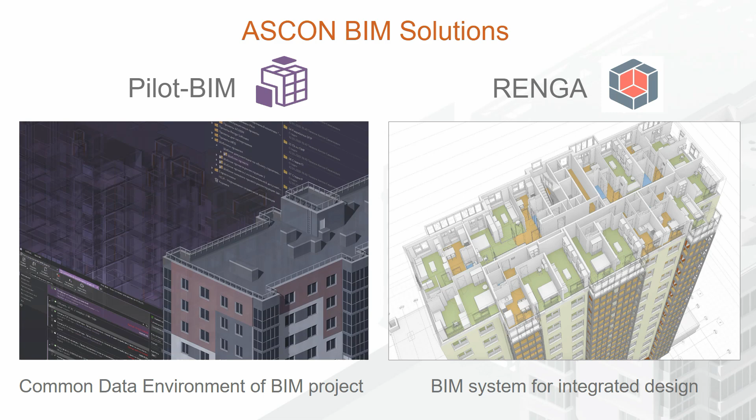If we consider the products throughout a building's life cycle, Renga will cover the initial design stage, from sketches to detailed design. The Renga BIM model, created during the design stage, can be actively used at the subsequent stages. Pilot BIM, as a common data environment, covers all stages and is used effectively during the planning and design phases, as well as during the pre-construction, procurement, construction and post-construction phases.

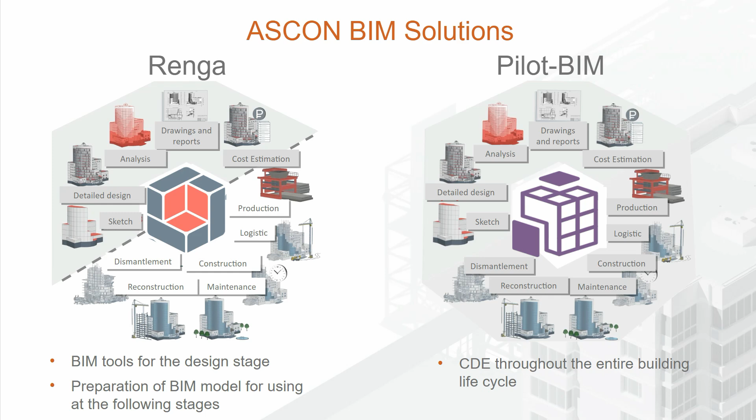In this presentation, we will focus on Renga's functionality. With Renga, you can create 3D models of buildings and constructions of various types and shapes. Our product team is focused on making our BIM software simple and accessible to everyone. Renga is easy to use and can solve all design tasks. It is based on a proprietary geometric kernel.

We will now show you a video demonstrating the system interface and the design sections.

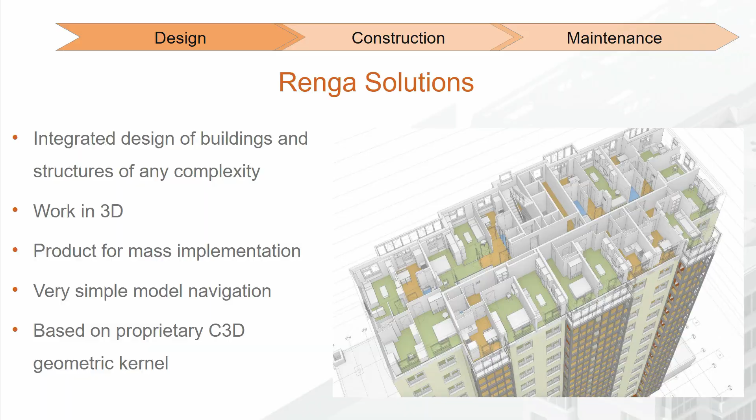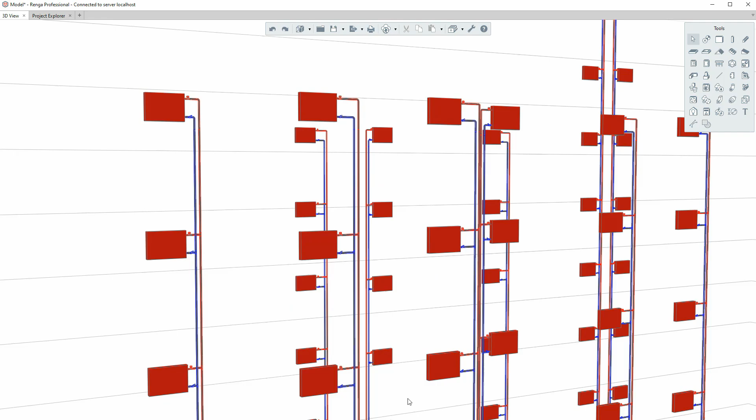Renga is a BIM system for integrated design. Users can create architectural projects, structural projects, 3D models of internal engineering systems, such as water supply and sewage, heating, ventilation, electrical networks. They can also work with process equipment.

One of Renga's main advantages is its unique real-time collaboration functionality. It works in a similar way to Google Docs. If your colleague adds an object to the model, you will see this object immediately. In Renga, all project members work in a single environment with the same 3D model. Each project team member can track the changes that their colleagues make. This reduces the chance of collisions between architectural, structural, and MEP solutions and reduces the time taken for model coordination.

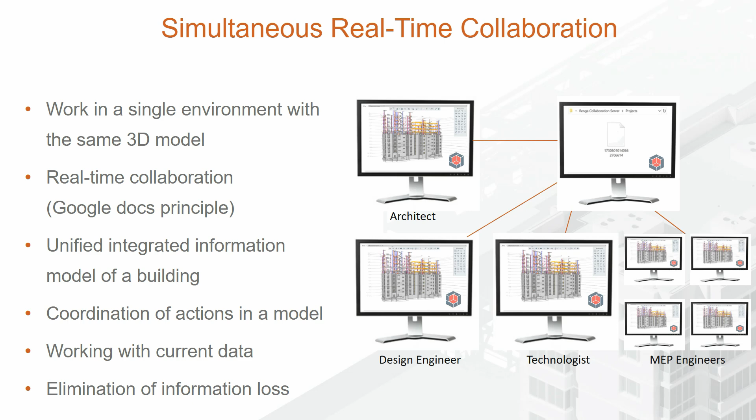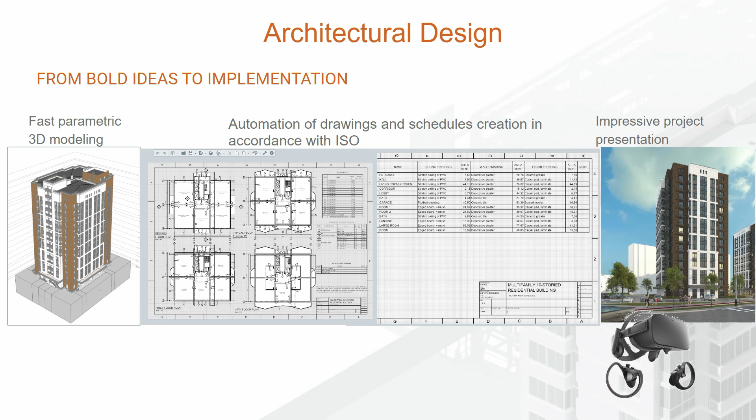Let's take a look at the tools available for each specialization. Renga gives architects the opportunity to complete all tasks of the design stage, from working with sketches of space planning and interior solutions to creating detailed plans and drawings, and transferring the project to rendering apps. You can create a limitless number of classical and modern architectural building forms, as well as working with complex architectural forms. We will now show you projects created by our users with Renga tools.

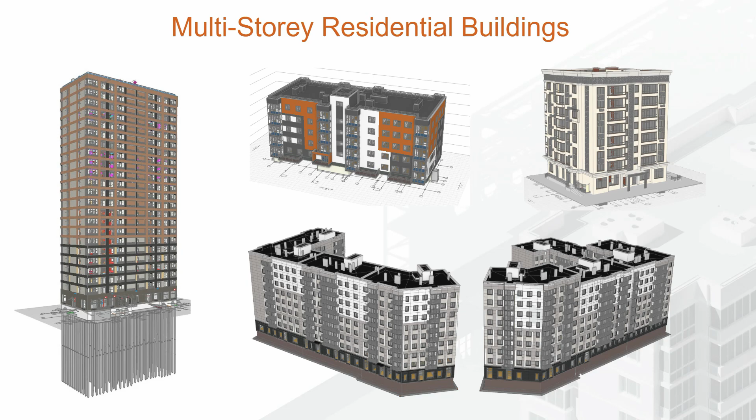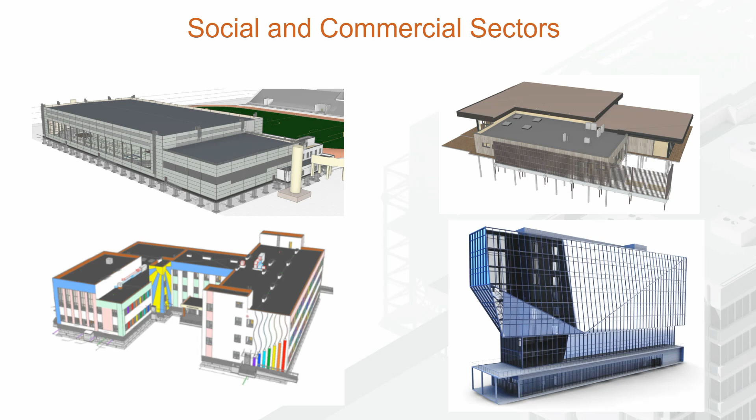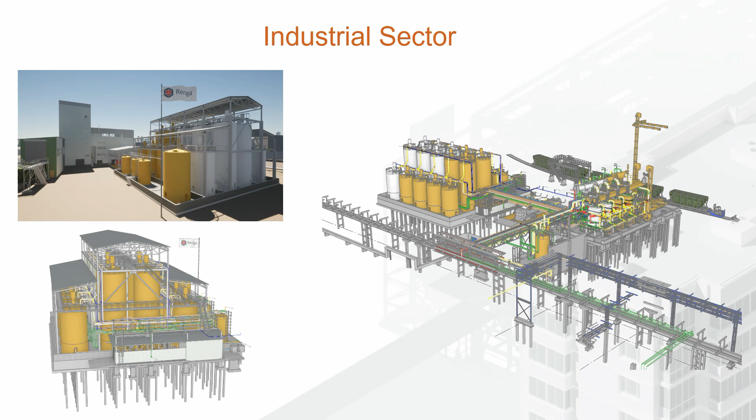Residential complexes. Different types of individual residential buildings. Renga is widely used for designing schools, universities, kindergartens, hospitals, stadiums, restaurants and shopping malls. It's also good for 3D modeling of plants, factories, warehouses and staff modules of industrial buildings. Moreover, it is possible to make reconstruction projects of cultural heritage objects in Renga.

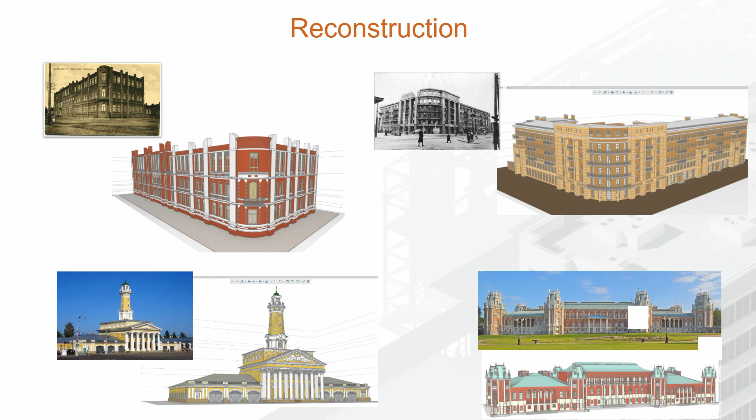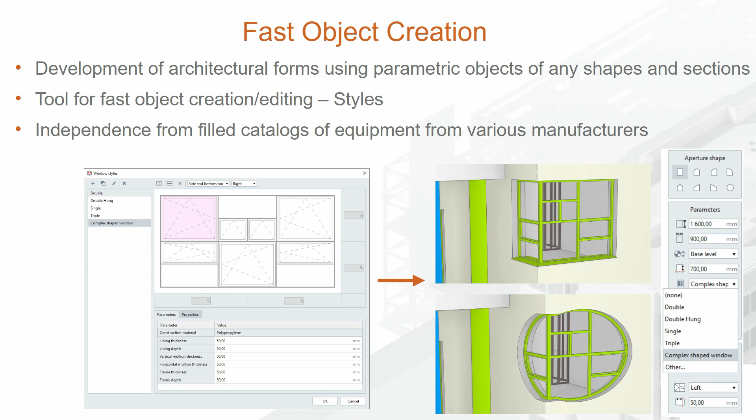Renga objects are created using the Universal Object Creation tool, Styles. To create a new object, simply select the appropriate base object and change the specified parameters for this type of element. This means you become independent of catalogs of equipment from various manufacturers. Let's see how this works.

Renga provides architects, design engineers and internal network engineers with tools for the rapid creation and editing of objects. All Renga objects can be created in under a minute thanks to the built-in Styles tool. To create a new object, click the Manage Styles button on the primary panel.

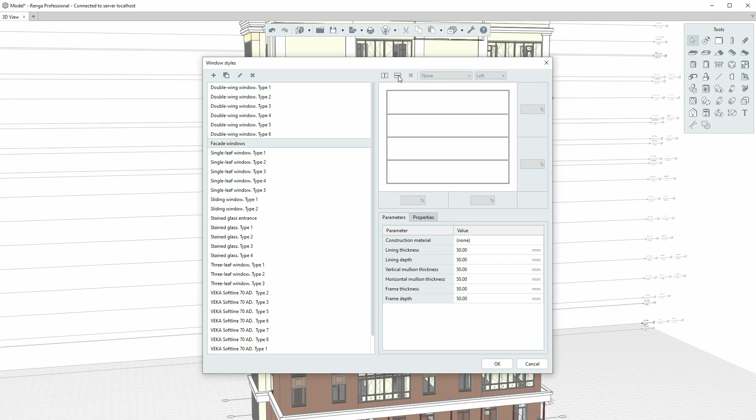Select the required object type, for example, Window Styles. In the Window Styles editor, create a new style. Then, on the right of the window, add vertical and horizontal mullions. Specify the parameters. Click OK. Now place the created window in the model.

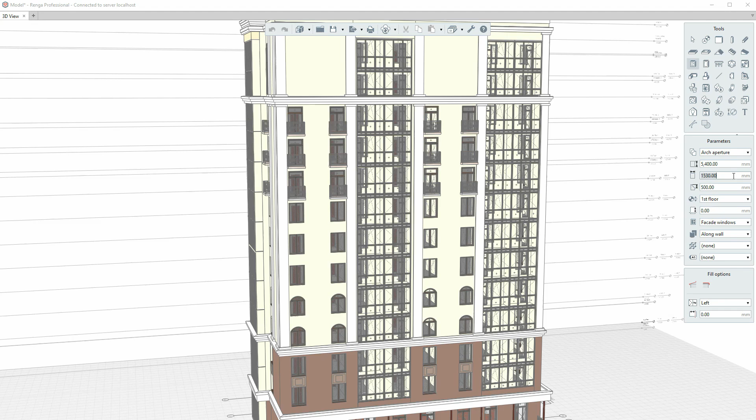On the Tools panel, click the Window tool. Set the window style and specify the window parameters. Finally, select where to install the window in the wall.

In Renga, it is possible to create objects with different levels of detail. These range from elements with decreased level of geometric detail to complex elements with a higher level of detail.

Users can also work with imported objects. The system allows users to import 3D models of solid and polygonal geometry, as well as IFC files. Architects can assign custom parameters and properties to imported objects, or modify their geometry. All elements, together with their parameters and properties, will be reflected in the drawings and taken into account in the schedules. One more important feature for architects is the ability to work with textures.

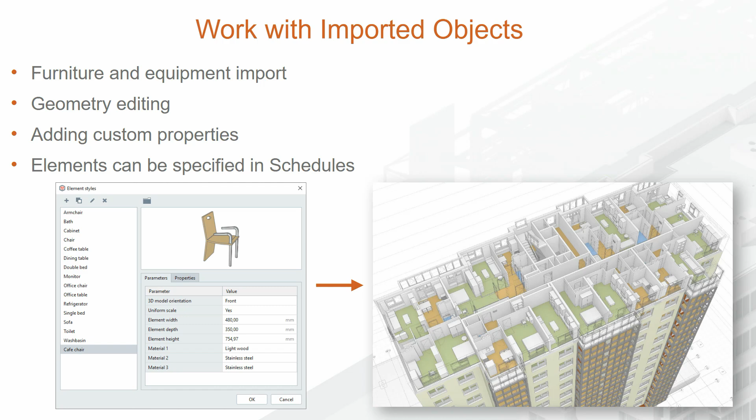Let's now see how this is implemented in our BIM system. The visual style of a model and its drawings can be represented in wireframe, monochrome, color or textured ways. When you select textured, the textures assigned to materials are displayed on object surfaces.

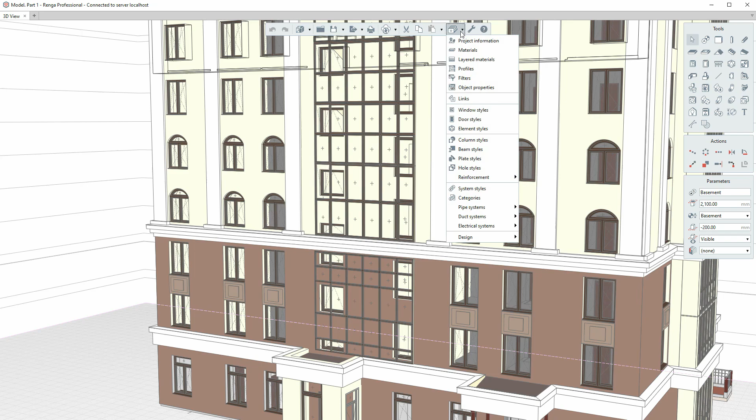To assign textures to materials, click the Manage Styles button on the primary panel. Go to Materials. Create a new material or select one to which you want to assign textures. In the Textures tab, specify an image file in PNG or JPEG format, and set the parameters of its display on Renga objects. Click OK. The texture will then be displayed.

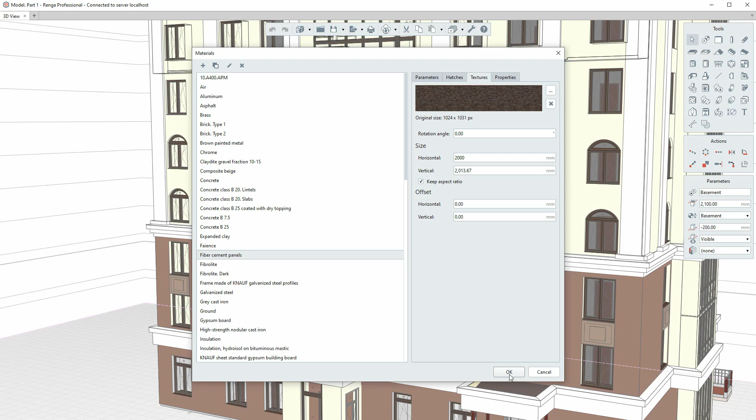This was a brief introduction to the basic functionality required to create architectural 3D models. We will now smoothly move on to the next section.

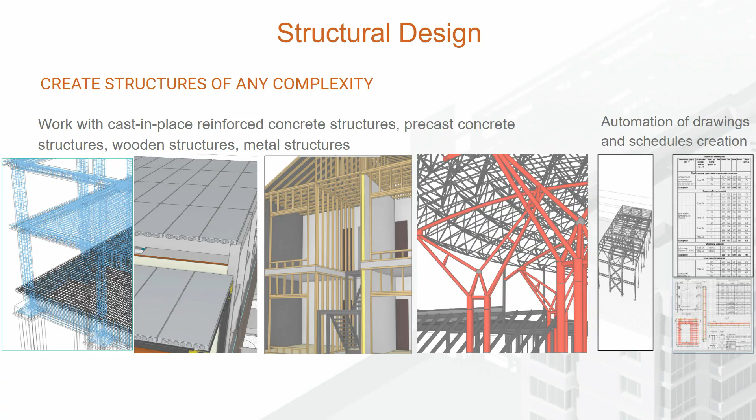Renga provides design engineers with tools for designing monolithic concrete, precast concrete, metal and wooden structures. Two types of structural reinforcement are available for cast-in-place reinforced concrete structures: automated and manual. The automated reinforcement tool significantly speeds up the distribution of rebar in cast-in-place reinforced concrete elements.

To use this option, users need to set a reinforcement style. This is a set of rules based on reinforced concrete structure design standards that can be customized by users. In accordance with these rules, Renga will reinforce structures. The following video will demonstrate the automated reinforcement tool.

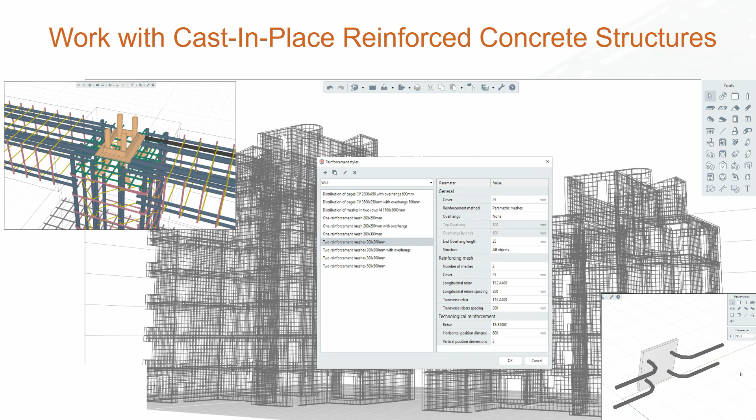In Renga, you can automatically reinforce objects using the Reinforcement Styles tool. To use this option, select the objects you want to reinforce, go to the Reinforcement Styles tab, select an existing style or create a new one by specifying the reinforcement rules.

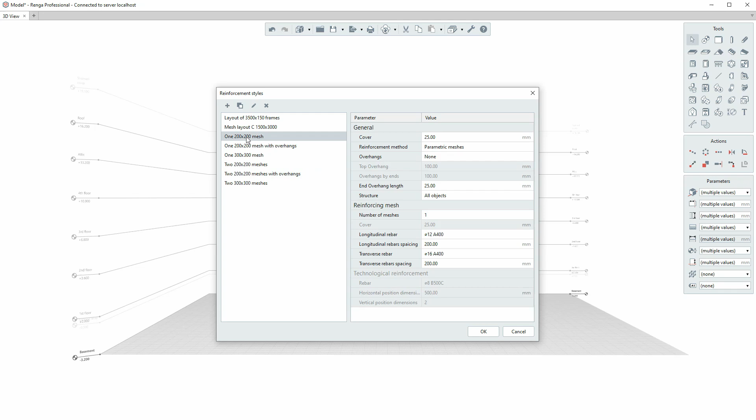You can use different methods of reinforcement: reinforcement with rebars in a given object, and ready-to-use reinforcing meshes and cages. Finally, click OK. Renga will reinforce the selected objects.

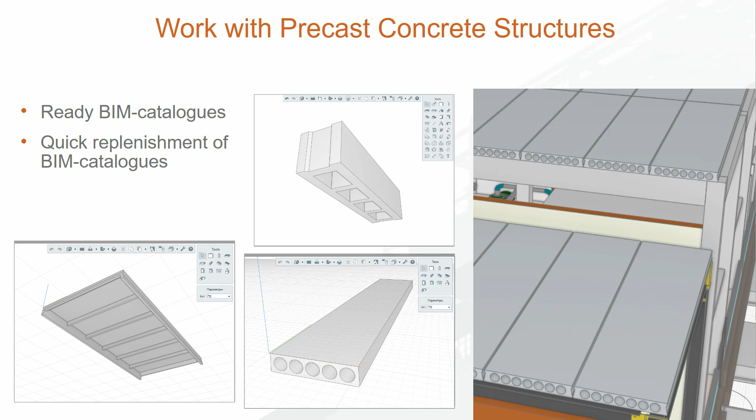Another Renga option is to work with precast concrete structures. The Profile Editor can create profiles of any type and shape for precast concrete structures.

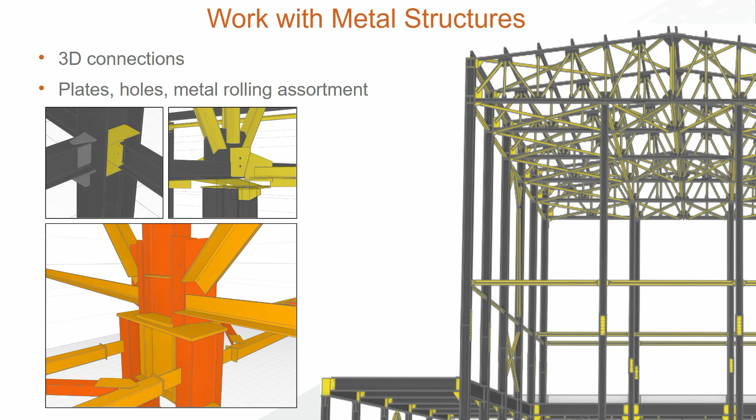Renga provides tools for detailed 3D connection design and creating metal rolling assortments, plates and holes of any type and shape for those who design metal structures. Let's take a look at how users work with metal structures.

In Renga, the main tool for working with metal structures is the Assembly tool. It is used to insert a group of objects created in the Assembly Style tab into a model. In this tab, you can arrange the main objects for modeling metal structures: columns, beams and plates.

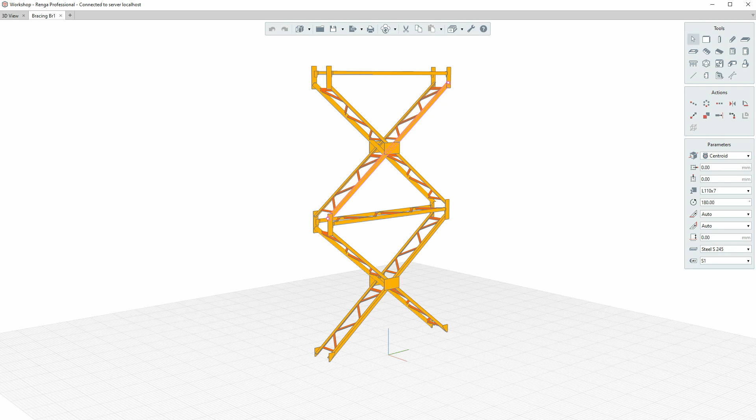Standard profile forms can be used for columns, beams and plates, for example a rectangle, an ellipse or a T-shape. You can also use the Profile Editor to create structural elements with non-standard profiles.

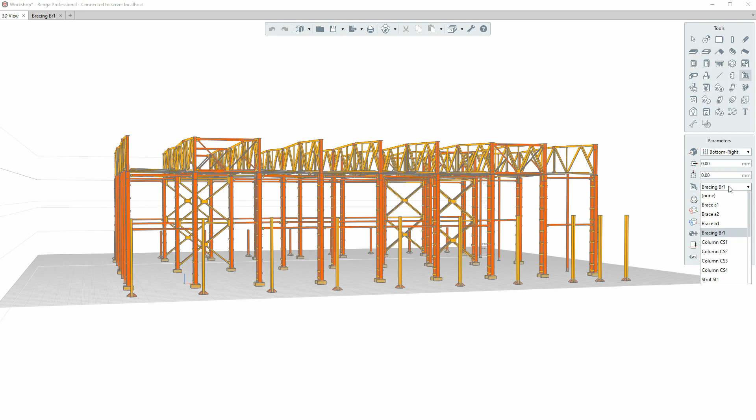To insert an assembly into a model, select the Assembly tool, specify the parameters, and select the assembly insertion point. If necessary, it is possible to convert the selected assembly into individual objects. For that, use the disassemble action.

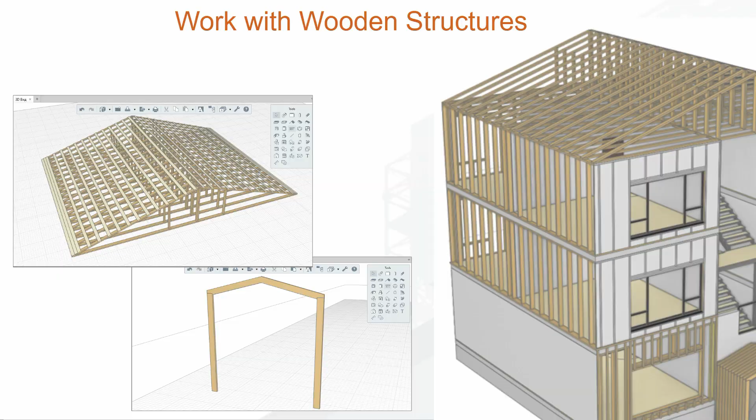The same principle can be applied to working with wooden structures. The next section is the Internal Engineering Systems section.

Renga provides users with tools to design water supply and sewage systems, heating systems and individual heat points, ventilation systems, internal electrical systems and low-current networks.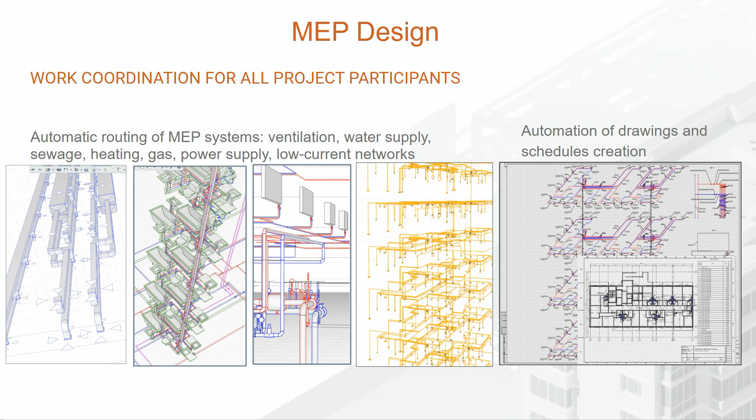There are several ways to create MEP equipment in Renga. The easiest method is to use the Universal Styles tool, which can be used to create all the necessary types of equipment of any manufacturer.

The second option is to apply basic programming skills and use a domain-specific language to create complex equipment. This enables you to develop BIM catalogs in accordance with your company's internal standards.

Any created equipment is automatically connected to the engineering systems using the automatic tracing tool. This tool automates MEP system tracing in accordance with the geometry of rooms. Watch how this tool works.

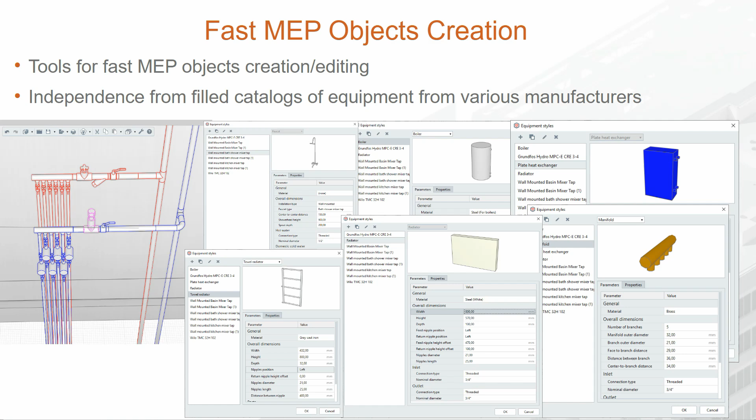In Renga, you can automatically route pipe systems, duct systems, and electrical systems. To use this option, specify the equipment you want to connect to the engineering systems.

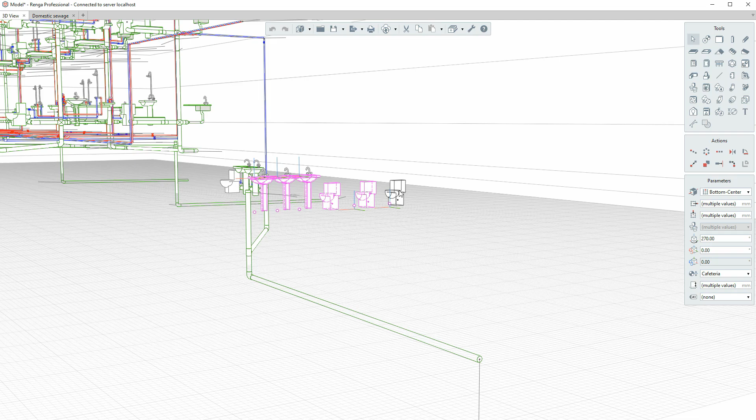Select the equipment in the appropriate system tab. Set system parameters configuration. Click OK.

Then determine connections between objects in the tab with a system. Renga will automatically generate the sewage route.

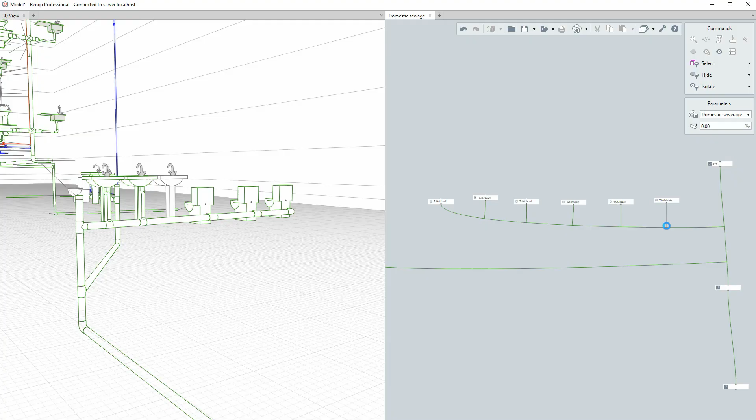During the routing process, the program considers the architectural section objects, such as walls, foundations, beams, columns, windows and door openings. You can edit the result in 3D view if necessary.

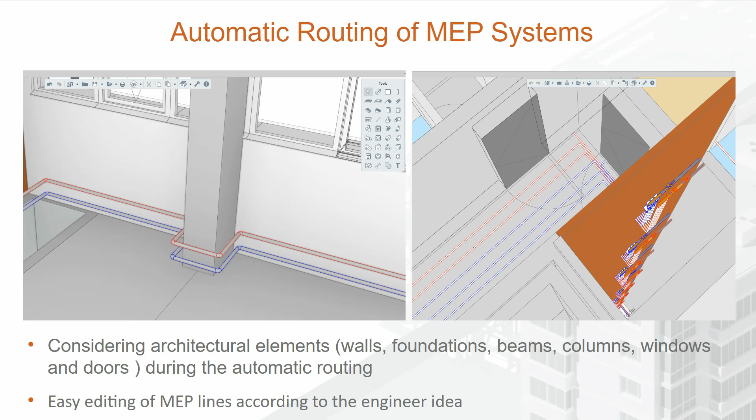The final section is the Industrial Equipment and Process Design section. Renga can be used as a solution by construction technologists. To design complex technological objects, you need to create process equipment and lay technological lines using the automatic tracing tool.

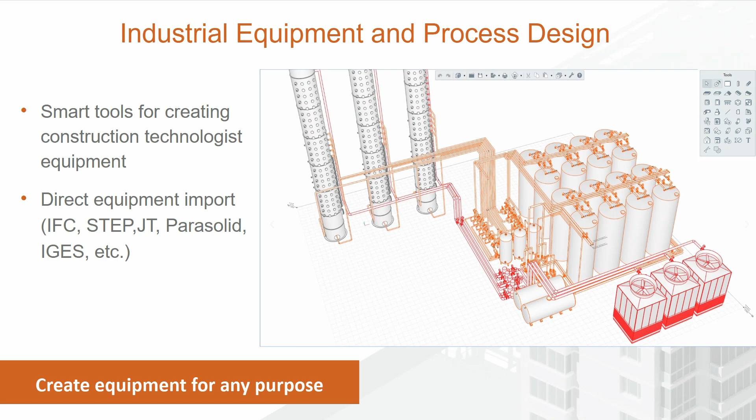At the end of the design process, drawings, specifications and sheets are released. The built-in drawing editor automates the creation of project documentation. Floor plans, elevations and sections are automatically retrieved right from the 3D model.

The schedule tool is used to perform accurate structure volume and material quantity calculations. This tool automatically collects object data and generates reports in table format.

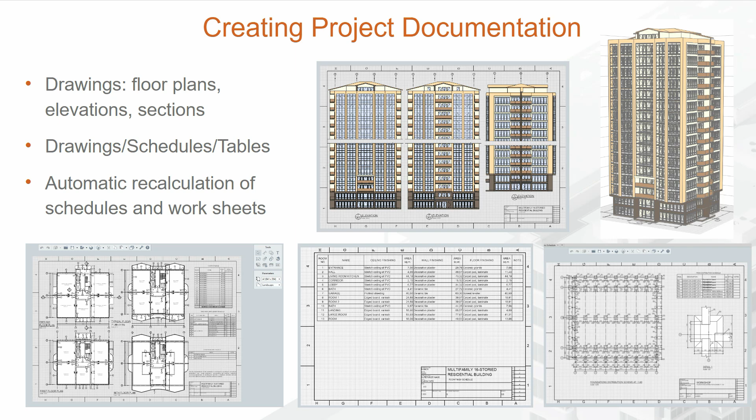If changes are made to the 3D model, the schedules will be recalculated automatically and the drawings will be updated as well. Automatic generation of axonometric diagrams is additionally available for internal engineering systems.

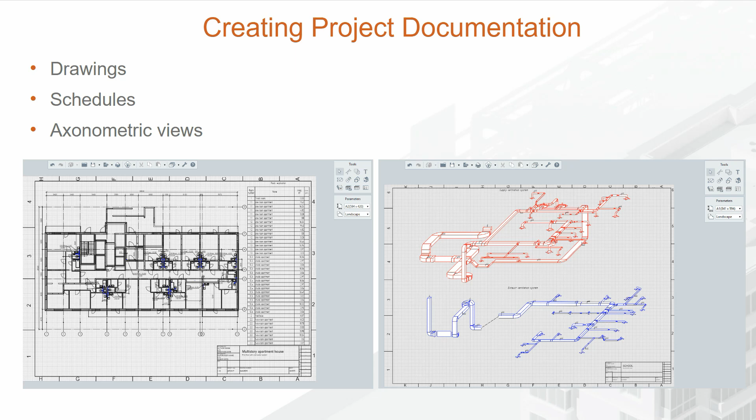We understand that, when working on a project, specialists may use different tools to solve specific tasks. To avoid problems with exchanging data between all the programs used, you can import and export the Renga model in a wide range of formats: solid file formats such as JT, STEP, Parasolid, and IFC for the Open BIM approach.

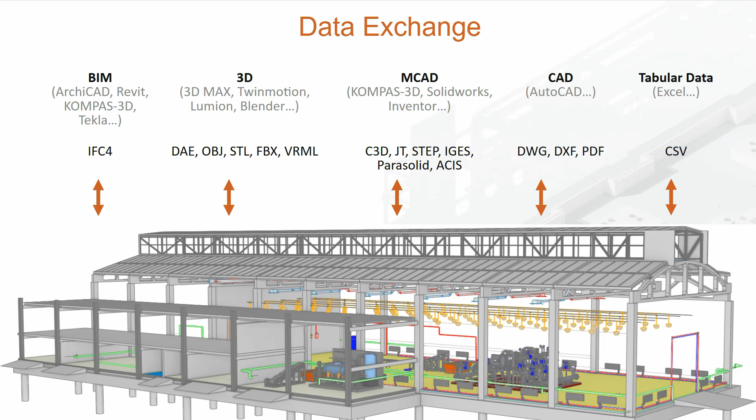The ability to import and export in DWG and DXF formats helps you to interact with other CAD systems. You can also import DWG, DXF or vector PDF data into a drawing or insert it as an underlay in the 3D view.

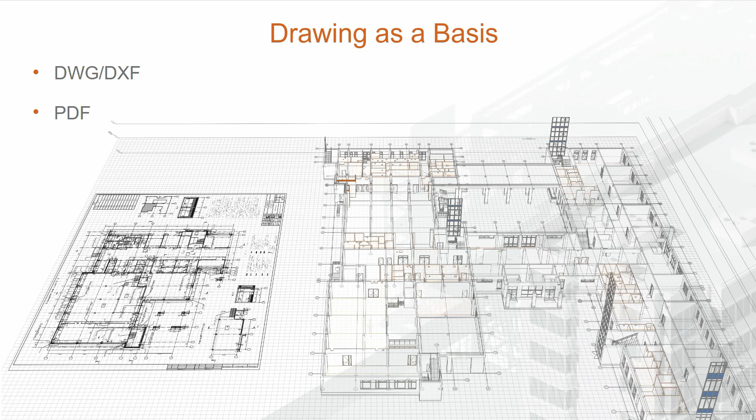In conclusion, there are a few points to mention. Renga offers different types of licensing. You can choose the one that best suits your needs.